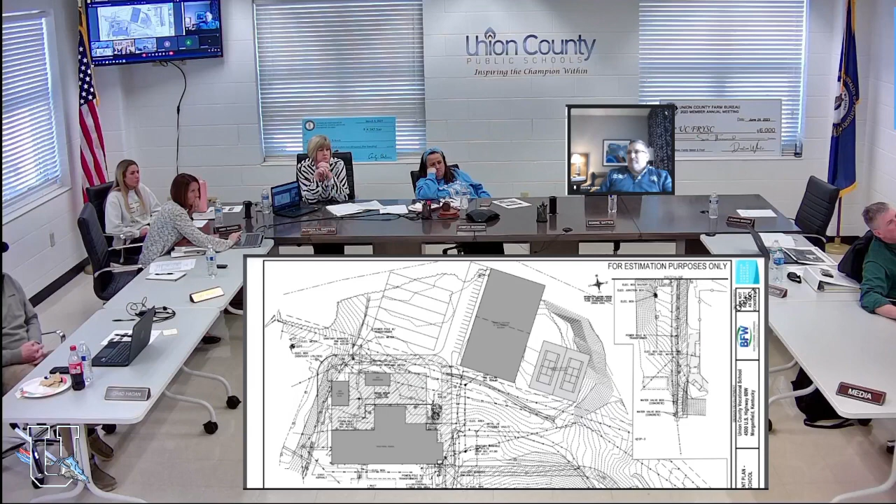The biggest thing is obviously we know that we want to do this in the most economical way that we can, and just sitting all of those, displacing all those utilities along with some of the grades that we were going to have to deal with at that location presents a challenge for us, especially from a budgetary perspective.

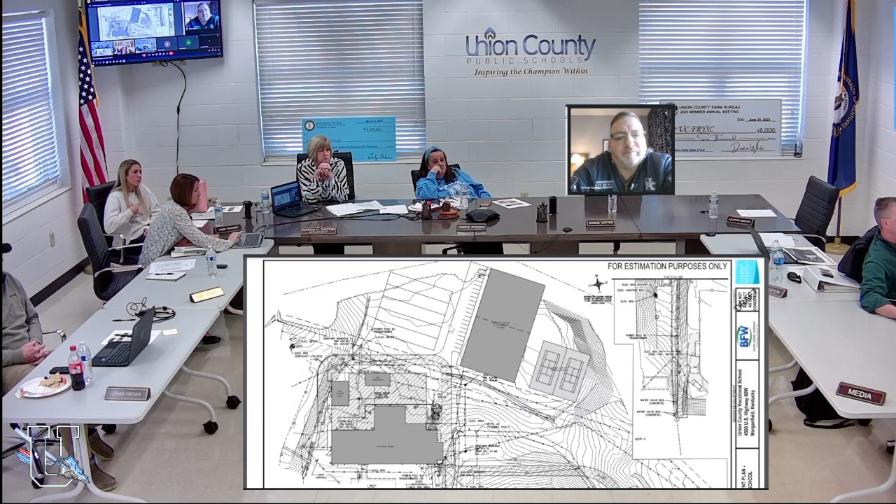So you can see kind of how a lot of these contours get pretty close in this area as well. The football practice area, if we can, kind of take some of the edge of it and maintain an area that can be used for practice, that area is much flatter, so our site development costs can be minimized as well. So those are the options we're looking at there.

I have another meeting scheduled with Alliance, the construction manager, as well as our design team on Friday to continue to think through these options and make sure that we're thinking everything through at the other locations.

So this is across the highway at the middle school property. The lower drive that you see there, existing asphalt that's indicated, is actually the drive that goes back to the bus garage. And this would be the new maintenance building. So it's really the only piece of the puzzle, if you will, that gets displaced across the road.

Everything else is right here on the high school campus. So the middle school is directly up above this if you were to zoom out. But just from a site perspective, that's kind of where it's at with some minimal parking.

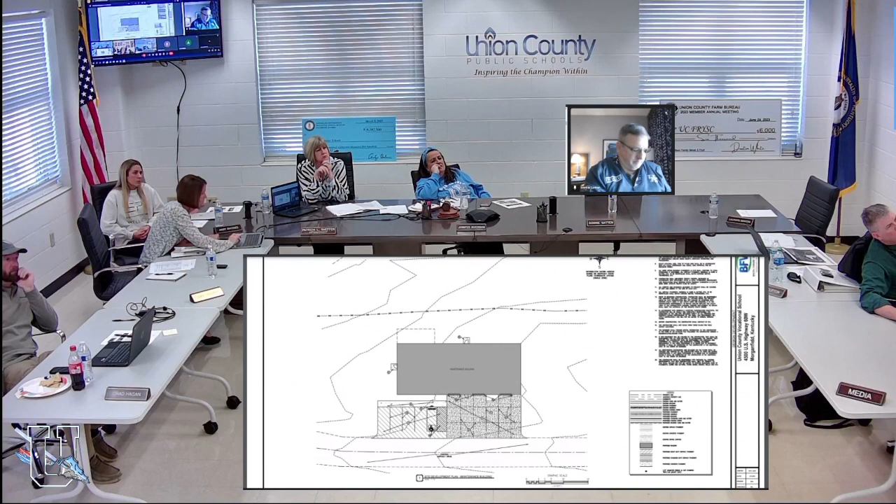So there's just like five total parking spaces, and then the concrete apron that will kind of allow service access to overhead doors along that maintenance building edge. So, and we'll get into some of the details with that as well.

So the biggest portion of our project is obviously the LAVEC renovation of the existing vocational building. We've been working closely with the staff to make sure that we're giving them exactly what they're looking for, and working closely with them about what their equipment needs are, how these spaces continue to develop. So we've been in several meetings with them to make sure that, one, we're not just giving them what they need today, but we're trying to think through what they may need tomorrow.

Also, think about how that space compares to what they have today. We've had very good meetings with them, and this is the overall plan.

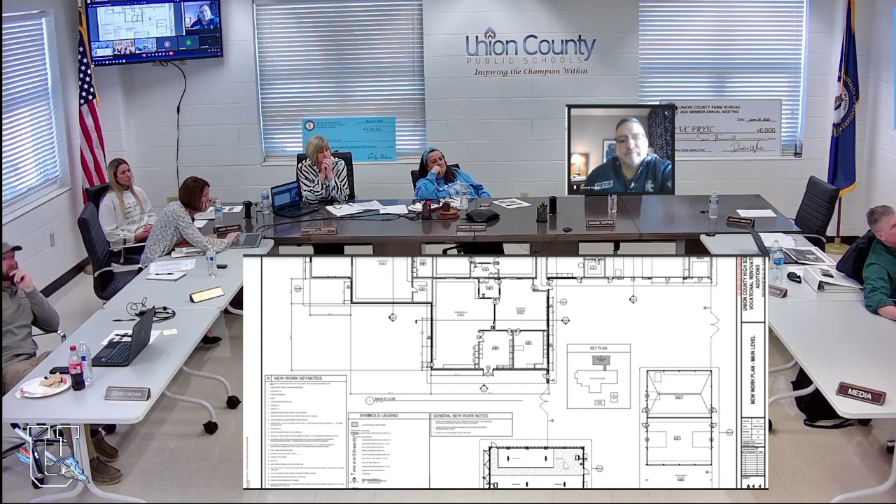If you zoom out just a little bit, scroll lower. Right there - I wanted to point out in the lower right-hand corner, the new storage building and the new greenhouse. Those help to define an outdoor courtyard and service area that can be used by the ag classrooms. All that space will be enclosed, and you'll no longer be able to drive through there. We're rerouting the drive so that becomes a safe area for students and staff to move back and forth between the storage building, the greenhouse, and the main vocational building. That'll be a much improved area for students and staff.

And there you can see, that is a building addition - we're trying to come out on the backside. It would be really challenging to put an addition between the vocational building and the high school, so we're coming out, growing toward the practice football field. That is primarily the civil engineering addition, and we'll get into some of those pathways.

There are no major changes from the last drawings, right? Just further development - the placement of the greenhouse and placement of... those have changed, correct? Okay, those have kind of settled where they've been.

So this is the lower level, and really that area will continue to be football locker area, but we're also moving a health and sports nutrition classroom down there. That will also serve as a wellness area for the football team. There's additional storage along the back, and then that central spine you see is really just further development of plumbing that's already there - it's just aged and kind of outdated.

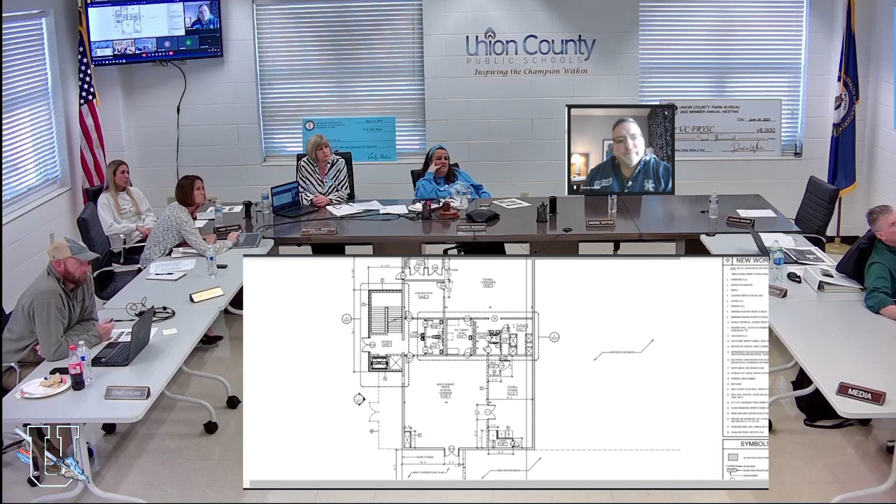On the left-hand side, that's a building addition that will be a vertical circulation. So students and staff, whoever enters the building, will now be able to move vertically from the main level to the lower level, which wasn't possible before. We'll also be looking at bidding an alternate for that elevator in the lower left-hand corner, so the hope is we can provide ADA access between those two floors without someone having to go outside and around the building.

So this is the greenhouse plan, and basically we've worked closely with the ag folks to make sure we're incorporating their comments. It's roughly 30 by 60 - comparable to what you see at most high schools that have had new greenhouses.

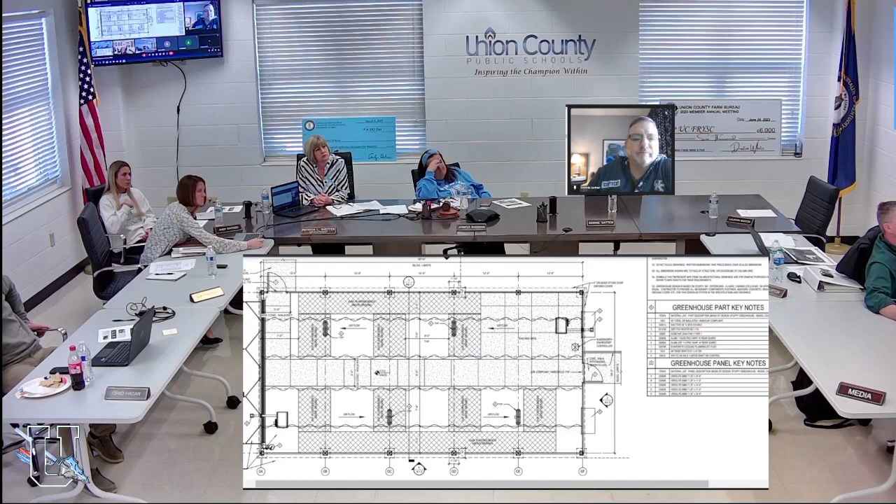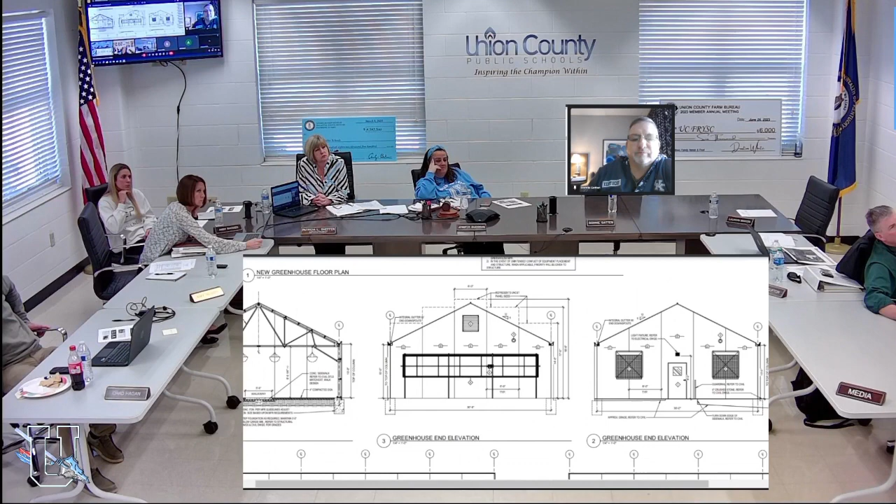And if you scroll down a little bit more, you can see what the outside will look like, as well as some features on the inside. The floor in there will be a combination of concrete walkways, primarily for ADA accessibility - we need to be sure we're accommodating kids or staff that may be in a wheelchair - but then a lot of compacted DGA or gravel areas as well, especially in the areas used for plants and that type of thing.

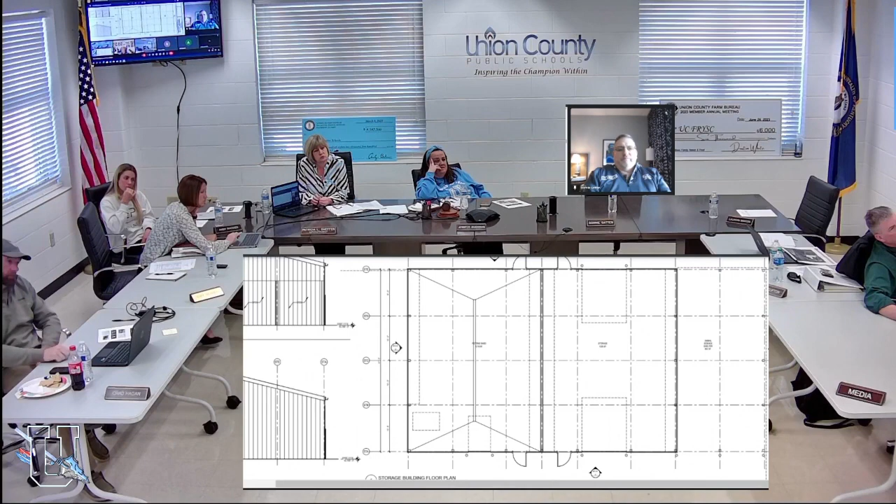So the next page is the storage building that we're putting behind the new vocational building. It can basically be broken down into three areas. On the left-hand side, a potting shed area used in support of the greenhouse. The middle area is utilized for storage, and on the right-hand side is what we're calling an animal science shelter - they do have animals they bring on site from time to time, and that will be a covered area where they can keep those animals on a short-term basis.

You can kind of see the exterior - this is basically very similar to what you would see like a Morton building. It's a wood framed building with metal panels and metal roof on the outside.

Moving inside the vocational building, this is the renovated ag area. On the upper portion, you have an ag classroom in the upper right-hand corner. To the left of that, you have a renovated animal science classroom with all the support spaces.

In that linear space at the bottom of your page, it provides access within the ag suite to those classrooms, but it also is a nice area for students to store their stuff in lockers while they may be doing welding or participating in other lab related activities. And then an office there at the end.

Moving down into the rest of the area, many of these spaces are very similar in size to what they are now. They're just reorganized and better laid out with the equipment.

Along the backside, you'll see welding stations. We've identified various pieces of equipment that need to go in there. But then on the right, you'll see tool storage, general storage, and then on the left-hand side, an additional ag classroom, some office area, and additional storage over there as well.

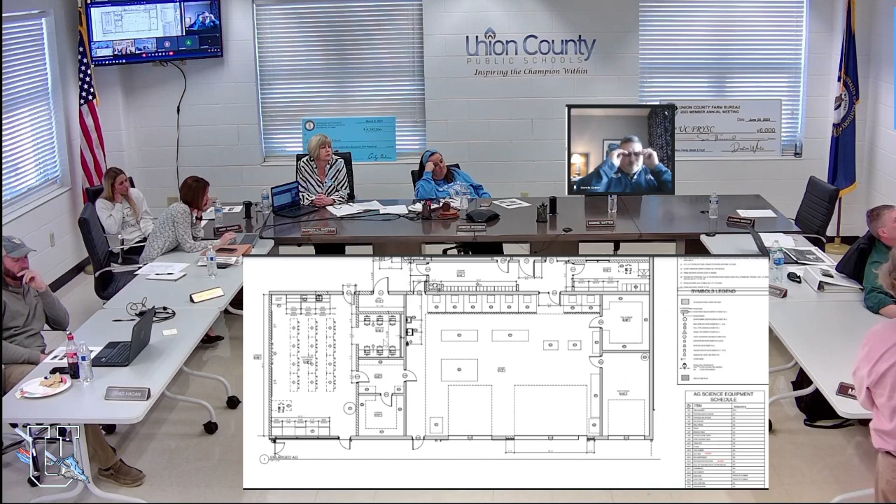So then this is the business classrooms. There are two business classrooms that you can basically see. The business classrooms have a kind of E shape - E on the left there and a backwards E on this side. That's the kind of table arrangement, and then countertops that will have computers around the walls.

Central, but located between those two classrooms, is a project area, and in working with those two teachers, they would like to utilize this area as a special kind of collaboration type area where they can bring students in and work on projects. It will also include visual access from their office below, but also an audio booth - I think they record different things and do some of those types of activities within that area as well.

And then the additions that we looked at earlier, it's civil engineering. On the left-hand side, you'll see the large lab, again with computers around the perimeter, tables in the middle for student use. Then the classroom is on the right-hand side, and the office area is kind of at the top of the page between the classroom and the lab, again with windows that provide visual access.

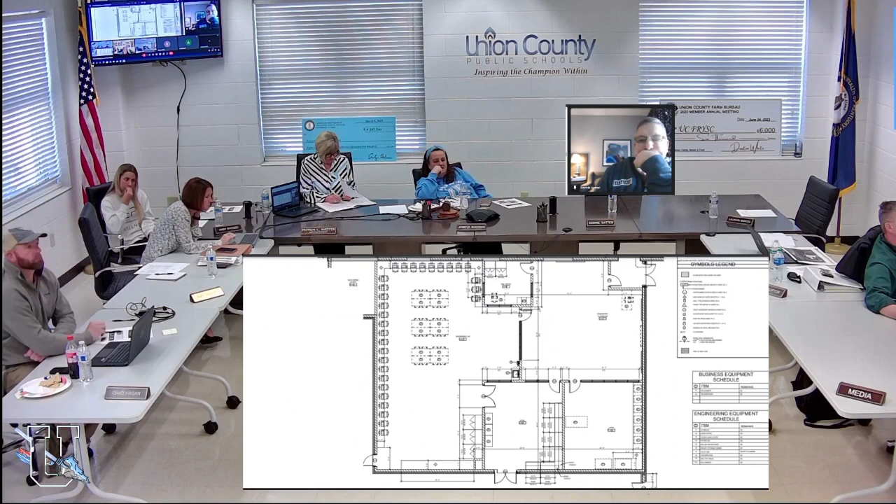Then on the bottom side of the page, you'll see a large storage area, which has access to the outdoors as well, so they can bring stuff directly into that space. And then also a room that can be utilized for laser engraving, I think, and some 3D printing and those types of activities within that room.

Then this is the computer classroom, the computer pathway. So it has a computer classroom, then a large computer lab with, again, computers around the perimeter and mobile tables that can be rearranged within the center portion of that space. Office and storage along the top, and then this is immediately adjacent to those business classrooms that you just saw before. So there's some collaboration that occurs there between the teachers that we spoke with as well.

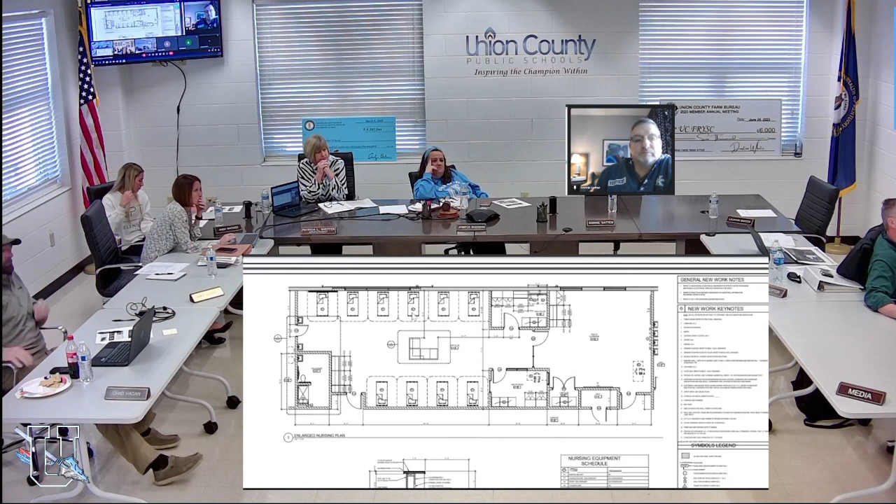Then the final pathway at the vocational building is the health science suite. On the right-hand side is the classroom, again a centrally located office and storage area above that, and then the lab, which includes 10 beds, as well as a large toilet and shower area where they can practice transfer techniques and those types of things that they'll be expected to be tested on, and different certifications that are required there.

On the outside of the vocational building, if you looked out the window right now, what you would see is over the years, as that building has changed, it's become somewhat of a patchwork quilt. So our upgrades on the outside will be minimal, but we're looking at covering some of those areas where we're making new openings and covering old storefront and different things where we're taking it out. We're going to cover that with metal panel to kind of refresh the outside, but more importantly, to cover up some of that brick that we know we won't be able to match exactly, and really give it a new look.

So the upper elevation that you see there, the rectangle on the left-hand side is the stair volume that you saw earlier on the end. And then the right-hand side there is that building addition where it's the computer lab and the civil engineering area that kind of extend into that back, what is currently that back parking lot.

This is the side facing the Board of Education, where we're at right now. You can see we're taking that brick wall, which already has a few patches in it, and covering it with new metal panel to give it a refreshed look, but also to cover up some things that we'll be patching and repairing as part of this project.

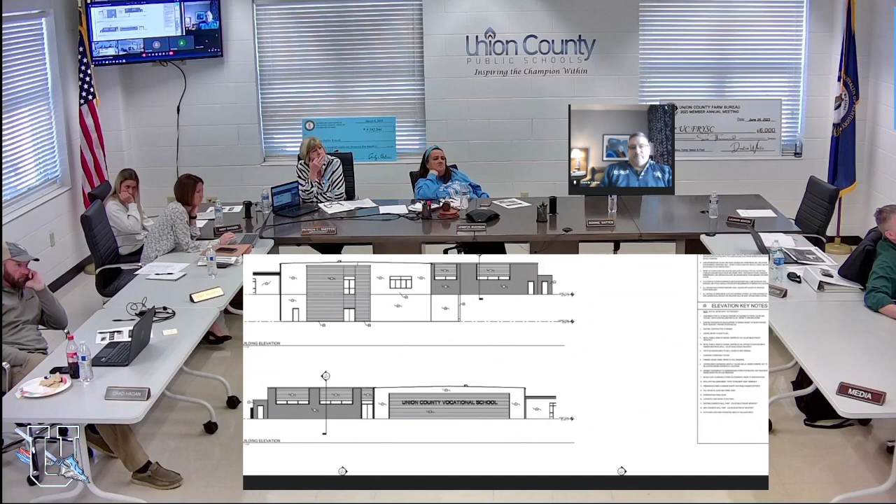The upper portion here is the side that faces the high school, and you can see the connecting corridor that goes back to it. The hatched areas are new metal panels. In working with Shane on the security requirements, we're keeping all the new windows up high so we can limit the amount of interaction with the outdoors and any potential security risk.

On the bottom, you can see we're replacing the overhead doors in the ag area, which leads to that outdoor courtyard space. It does have some windows that open onto that area from the ag space, but remember that area is completely surrounded with a fence, so it's fully enclosed. Everything on the left is the computer science addition with civil engineering, and then the stair on the left-hand side.

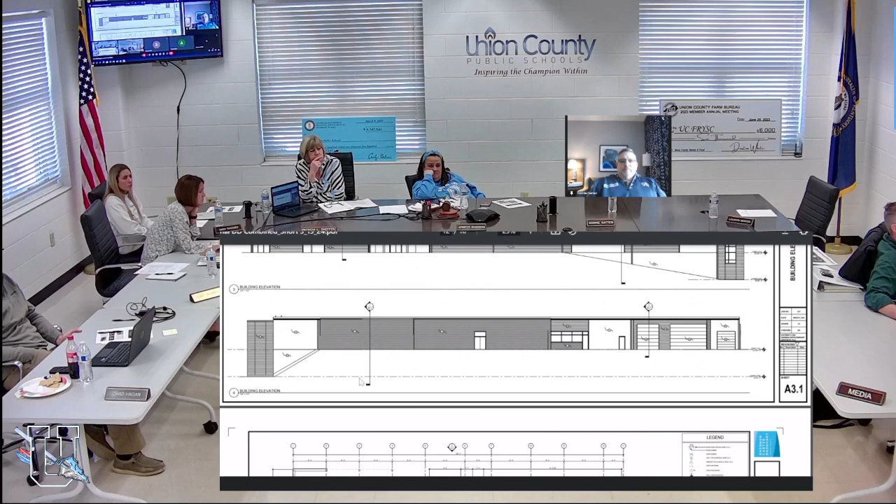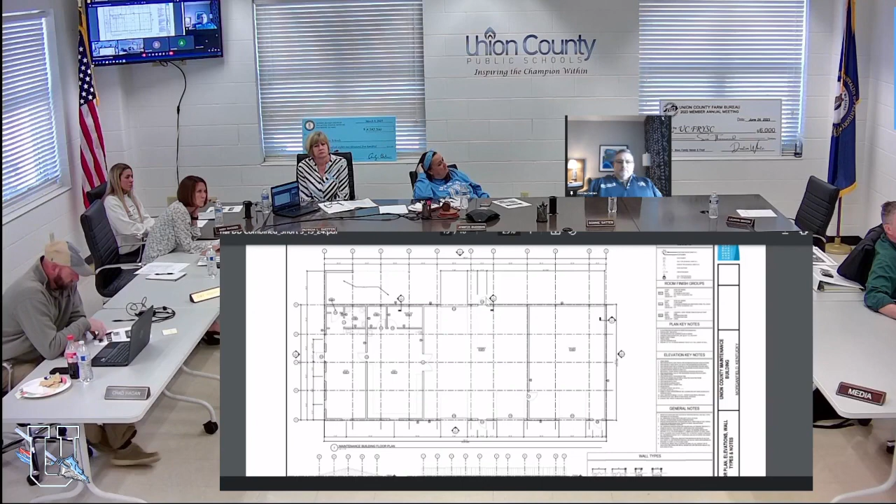Looking at the multi-purpose building, we have two options, as Ms. Sheffer mentioned before. The base bid includes the rectangle you see there, which will accommodate wrestling, cheer, and dance, as well as weight training and restroom and locker room areas. All of these spaces are necessitated by the renovation of the vocational building, since we need to move those activities so we can renovate the rest of the building for the vocational programs.

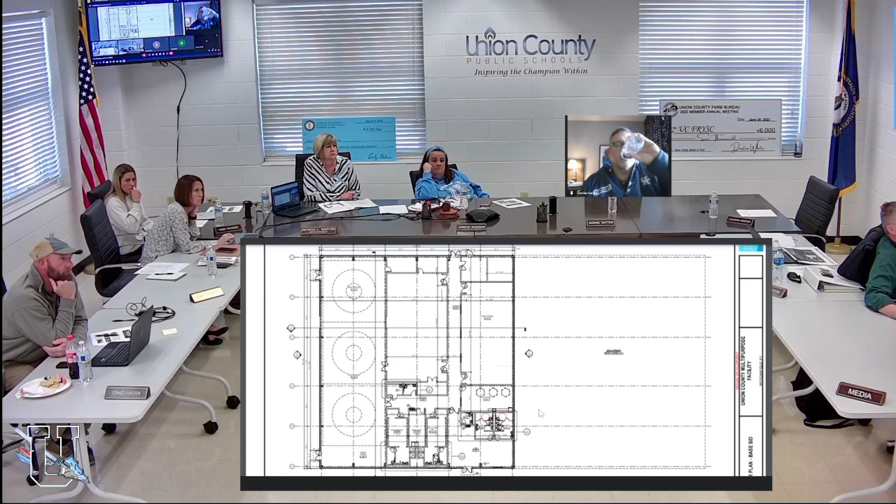The base bid accommodates all of those needs. Then on the add alternate, shown in the dashed box in the next image, you'll see an indoor practice area that can be used not only for football, but also for baseball and softball batting cages, archery, and even band practice—just a number of different activities.

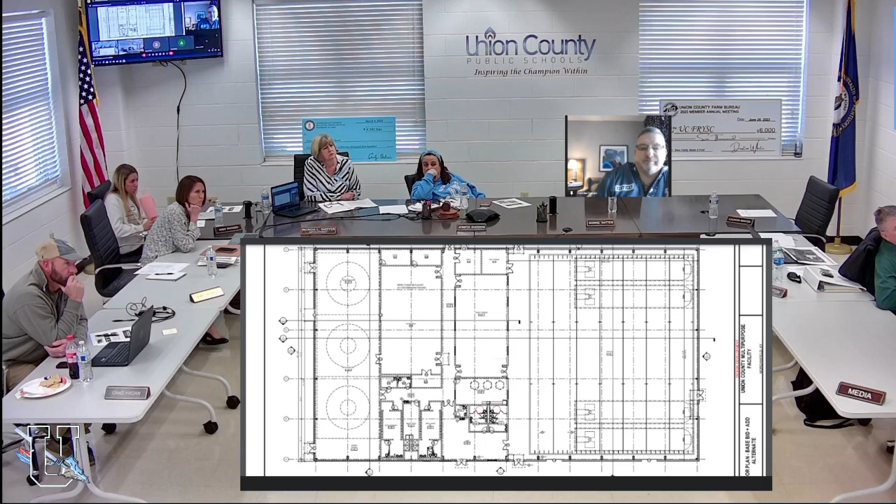The rest of the building is primarily the same, except in the base bid it will be an exterior wall, while with the add alternate, if accepted, that area will add windows and other features that visually connect the weight training area to the practice area.

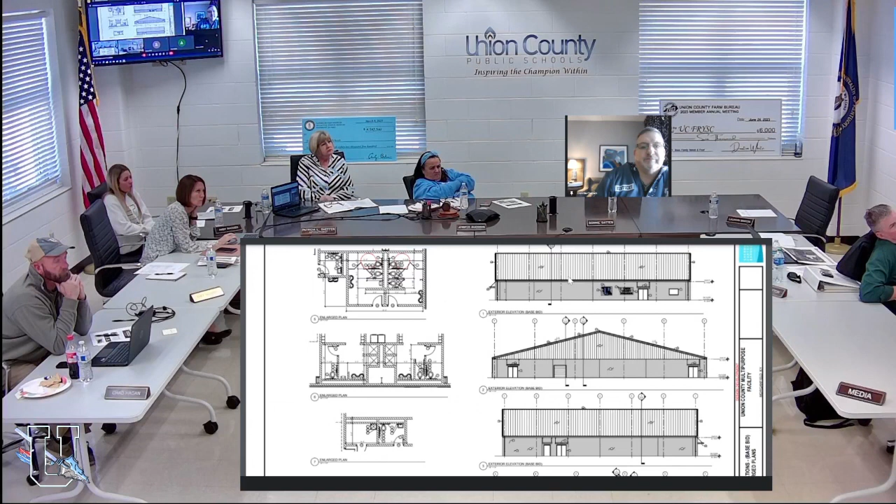This gives you an idea of what the exterior will look like for the base bid—very simple, with brick around the perimeter up to the eave height for low maintenance, and metal panel extending above that on the gable ends, as part of the metal building package.

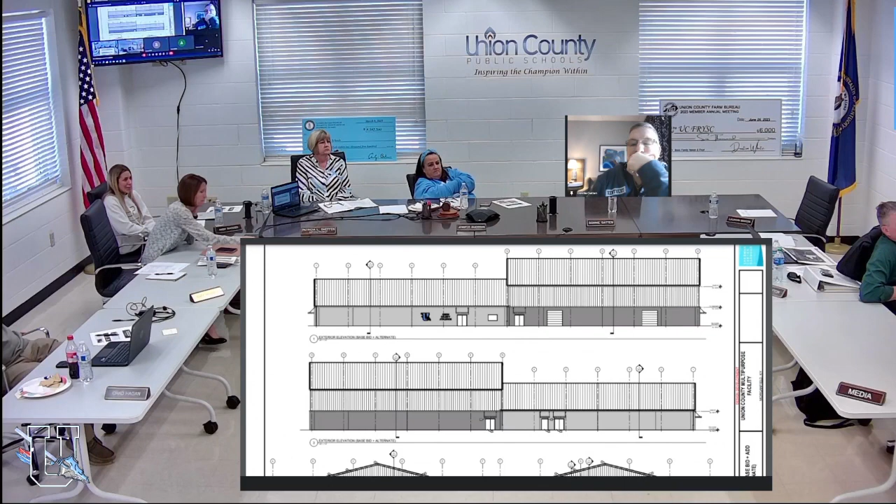With the add alternate, you can see the different, higher volume needed for football training and similar activities. Where we have wrestling, cheer, and similar uses, we're keeping a slightly smaller, shorter volume to help keep costs down. You can see how those volumes relate to each other—brick up to about 13 feet 4 inches around the perimeter, and then moving up from there.

This is the building section, which gives a good understanding of what those volumes look like. You can see that even within the cheer and dance volume, there's a lot of space so they can do their stunts and similar activities.

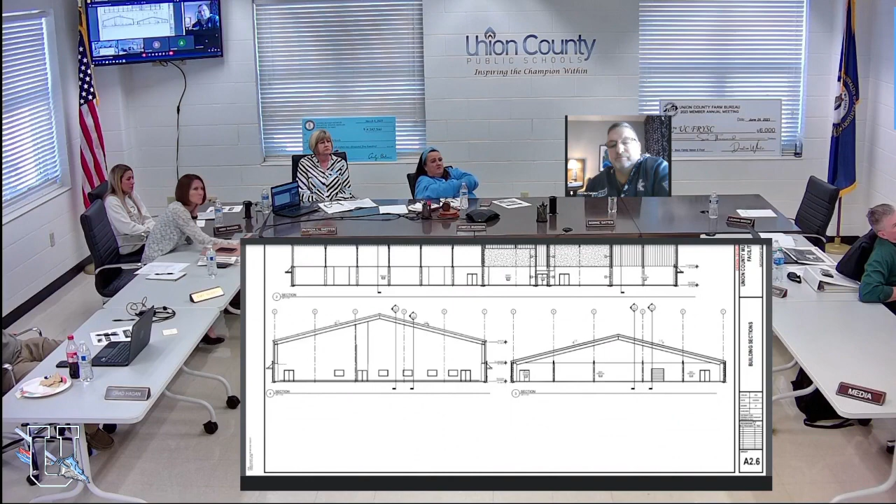I know that probably felt like drinking from a fire hose, but if there's anything I can answer today, I'm more than happy to do that.

Has that site been checked for pipes and electrical utilities in the parking area? We know where all the utilities are running now. It seemed like the bulk of the problem is primarily where we were siting the multipurpose building, with all the utilities that run to the concession stand, the softball field, and everything on that side of the field running through that area.

On the opposite side, where we're proposing a possible location for the tennis courts, we're going to look at doing some additional testing over there, probably at least some test pits. Obviously we won't have the kind of footings associated with the multipurpose building, but we want to make sure any paving and those types of things are on good soil. We have the road location and did some preliminary testing on it, but we'll need more information for where the tennis courts might go.

How much room is there allowed for parking there? We'll need to look at that as well.

The one thing we've talked about is that loop road that extends from where we were proposing the multipurpose building and around the backside of the football field. We're looking at that as an add alternate. We think it'd be nice to have, and it will help ease congestion, especially coming up on this side of the building and extending around the back. But if we get into a situation where we have to cut some costs, that may be one area we do that.

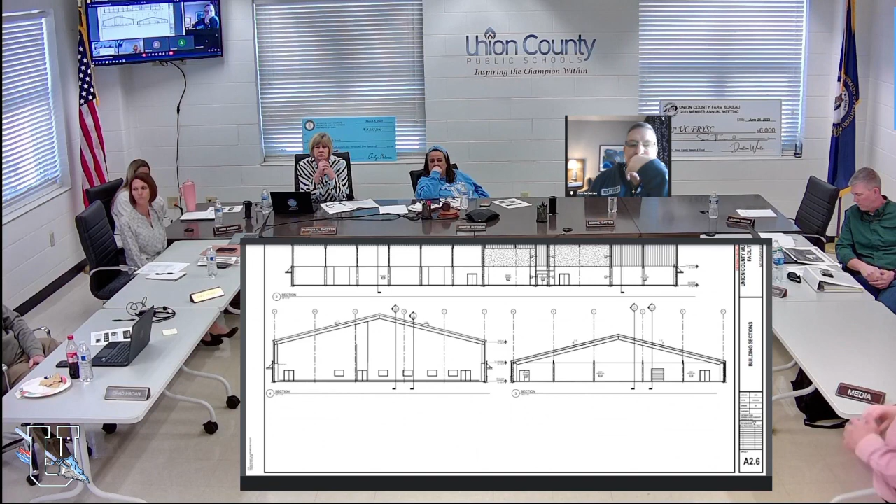We'd also looked at possibly picking up some additional parking spaces on that side by softball, and we'll look at that when we put the tennis courts over there to see if maybe we can pick up a few spots. There's some parking by the football locker room, right? Some, yeah, is that what you're talking about?

Yeah, we had talked about over on that side maybe picking up a few spots, primarily for softball. I think primarily they use the parking lot below where a lot of students park, but for accessibility reasons, especially if we can get folks up on top of the hill closer to the softball field, we were looking at possibly picking up some spots up there as well, kind of like we did at the baseball field, those couple spots behind the bleachers, to accommodate up behind the softball.

Well, I personally like the idea where the new proposal is better than the old. The old timers always say, if you're gonna build something, build it on a hill - that's a hole down there at the football field. Well, we would have to add a retaining wall too around all that. Sure, you're gonna have a lot of drainage to deal with around that building.

That's why you get the engineers involved. It's kind of a little wasted space right there, so I understand trying to fit it in there, but I think long-term, being on a hill like that will be better for the structure over time.

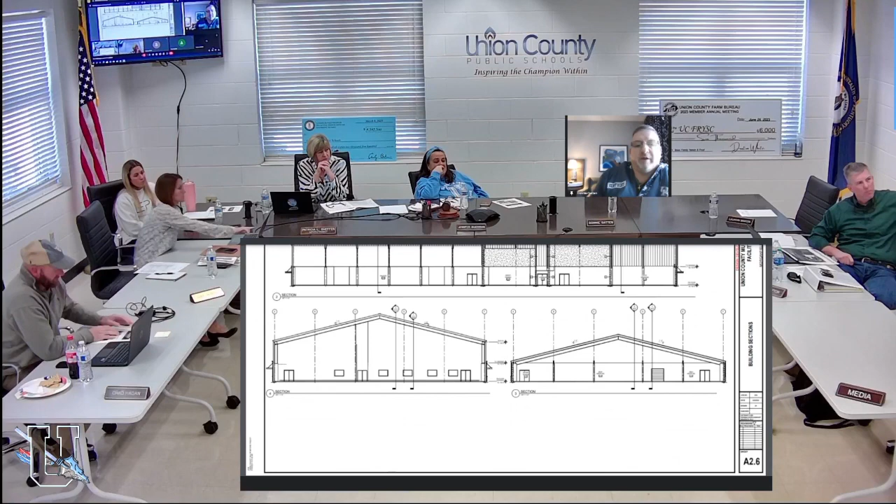Can you get the tennis courts on - sorry, go ahead. Oh, go ahead, Greg, you're good, go ahead. In this view you showed tennis courts, I think two courts - is there more room for future expansion there, or no? That's the old one, yeah, if you go down one page, Amy.

Sorry, I'm trying. Computer's not slow, it doesn't want to cooperate.

There's kind of a chicken and egg situation. If you're able to afford the indoor practice facility, then you probably won't need the outdoor football practice area quite as desperately, and you could look at expanding that into additional tennis court area. But until you know whether you get that indoor space, we felt like we need to preserve as much as possible that outdoor football practice area.

You can kind of see there, those contours on the right-hand side of the tennis courts get pretty tight. That's why I was wondering if there was room for more. Probably not.

Is the corner of that one tennis court in that woods? You can kind of see the clouded area. So we would be clearing a portion of that. Is that a complete drop off? I've never been up there. It looks like it drops off pretty fast, about a 30% grade.

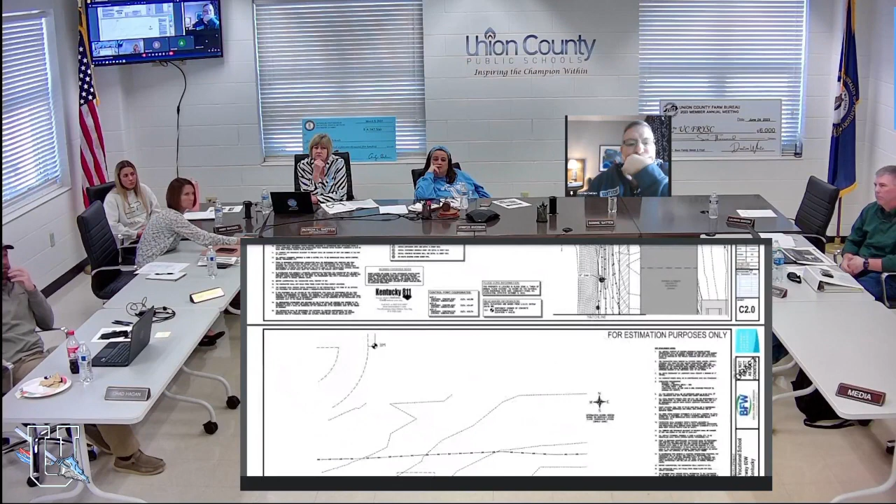So the inside of the maintenance shops, will they just have steel on the inside, insulation steel, or? It'll be a combination—in the office area it will actually have drywall, because we'll be heating and cooling that office area. So from an energy code perspective, we basically have to build a double wall to make sure everything is insulated properly. But out in the maintenance bays and storage areas, we're basically looking at heating and ventilation, so it'll be a combination of insulation and a liner panel on the inside to provide some protection.

Most of that is probably the most cost efficient—that's what we normally would put, a liner panel. But I'm just getting in my mind how, I didn't know if there was a certain R value you gotta meet out there. When we're just heating and ventilating, that's one thing. If we try to cool those areas, that's where we run into additional energy code issues we have to consider.

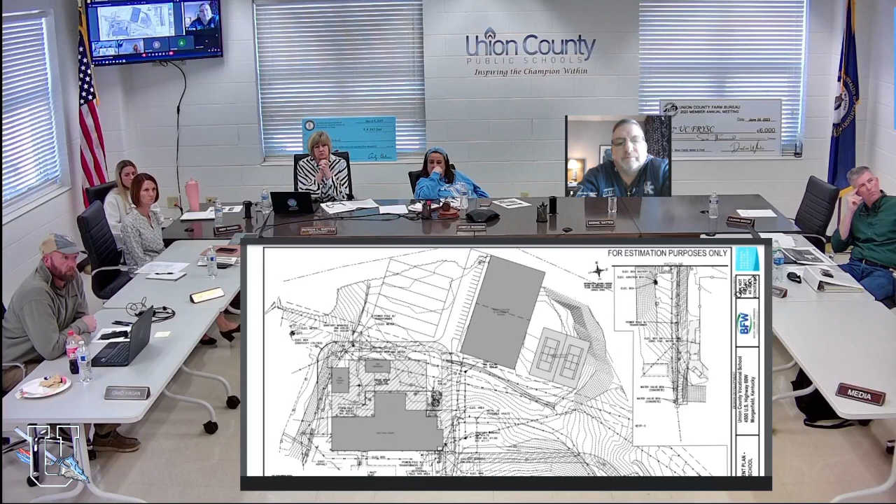So like the bus garage, with the steel building and the insulation—is that not more cost efficient than doing the wood structure? You don't have to really do anything on the inside of it, other than your offices.

Two considerations. One, those components we're moving are some of the first phases of construction, because we need to get them out of the way so we can start doing things over here on this site. Some of the metal building packages, especially here of late, have much longer lead times, so we feel like the wood package will help expedite that process. But two, in talking with Alliance, we felt like that was probably the most cost effective. When you get into longer spans and some different things, those metal buildings really make a lot of sense, like we're doing for the multi-purpose building—you can only stretch lumber so far.

I know I've gotten into it before, and sometimes you would think steel is just crazy higher, but you're allowed to do a little more with steel sometimes.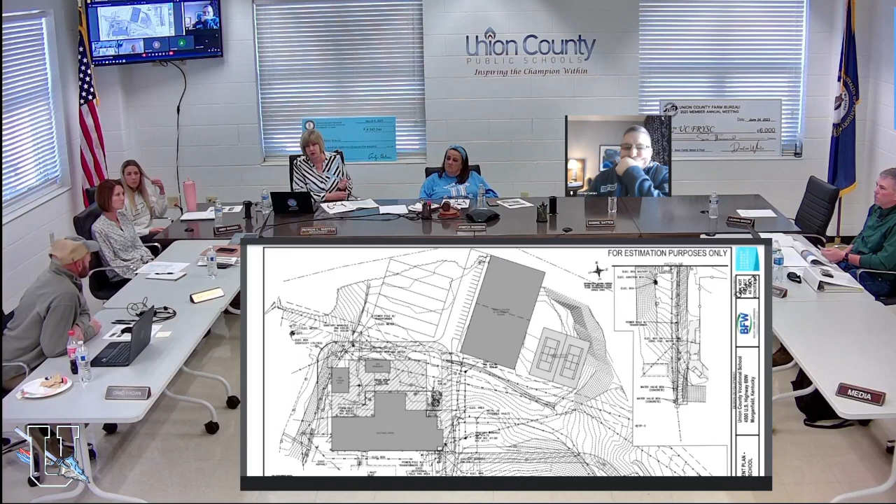On building 64, wasn't that big, right? We used to park on the side, but there's fiber optic under there now. We lost some parking with the connector. When I went to school, that's where I parked, on the football side. Then they had to put fiber optic in there, so now we're not allowed to park over there. We used to park on the hill on that side, but now we have to work around the fiber optic. We didn't have preschool out here.

I feel like it's actually gonna work out better up there, we talked about that, but just a lot of decisions to make. To me, if you want it on this property, that's the best option we have.

And there'll be some parking in front of that building, there's parking where we have preschool parking now, on the side of the vocation building, that'll still be there, and then all this parking up here, parking at central office.

But we're rerouting the road, correct? It's coming behind, yes, so it's gonna come around back to the football field, right next to the horseshoe, right through here.

So I could see people parking in this area. Well, I just didn't know, like, some of this...

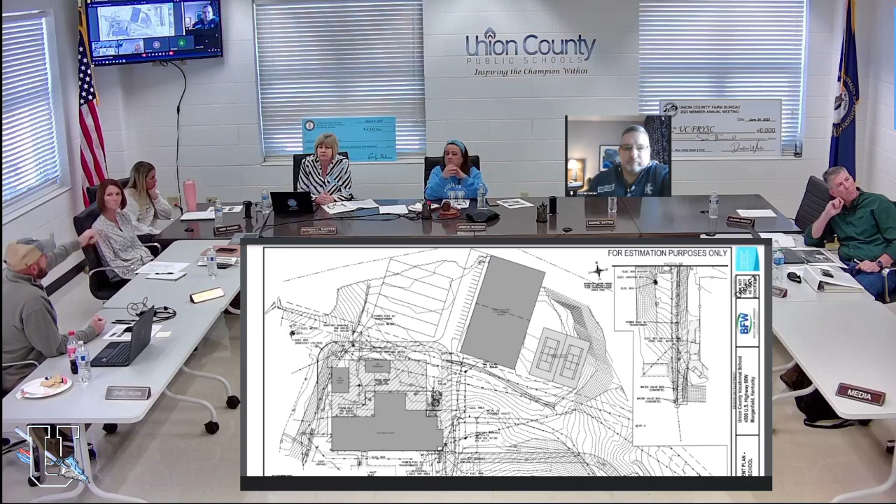Is their storage office or maintenance office now, is that all gonna be where the greenhouse is going, or is there some space there? It's got some. Right, that'll all come down, but then we'll have that courtyard for ag when they come out of the vocational building, and then you have the barn and greenhouse, so that'll all be set.

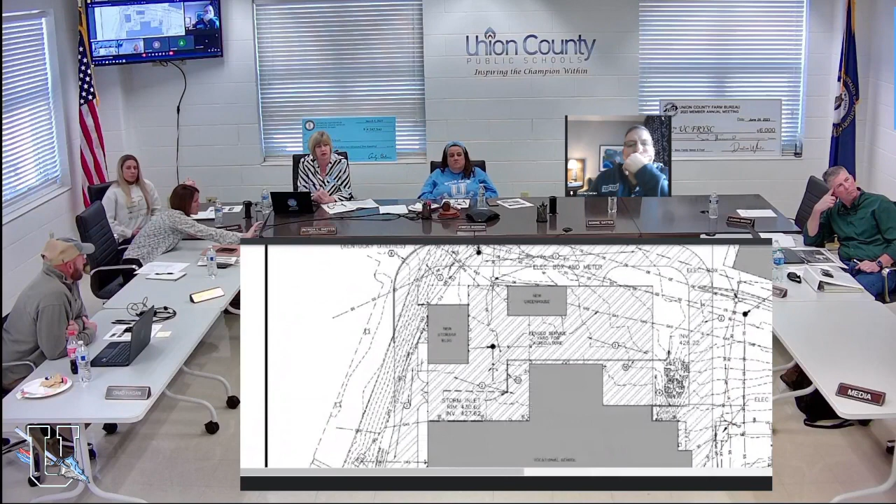Yes, because they need that space when they pull trailers in there and things like that too. So that'll be taken up, but we'll look at more of that. If we could add more parking to accommodate, that'd be great.

I'm just trying to get it in my head, like if you're gonna pull in 350 people in this building, we gotta make sure. I guess you could park here and walk, like they do now for ball games. I've been to a basketball game when we had regions and had to park at the middle school and walk over here.

We've done that for graduation and everything, yes. So that's my only thing in my head, is just trying to figure out how we can park. But, man, you can park here and just walk, get here early if you want a good parking spot. It's tough.

I think most schools running that, if you're remodeling, you have old buildings like 64, but if you have brand new ones, there's a lot of land they purchase. That would've been nice. We actually have more land at the middle school area than we do here.

Would've been nice if you could've made it work by the softball field down there, the girls' softball field, you had a little parking lot there. That was our first thought, but then the engineers got involved, and it was the water. You would've had to build it up high. Building up there still would've probably been easier than here beside it when you look at all the lines, but you always have that issue of water. For sure, in Kentucky, for sure.

Maybe jumping the gun, maybe a different phase of this process, but you talked about metal coverings on some of the exterior of the existing buildings and the new metal and brick of the new buildings. Color schemes and color choices, is that later on, or are you considering that now?

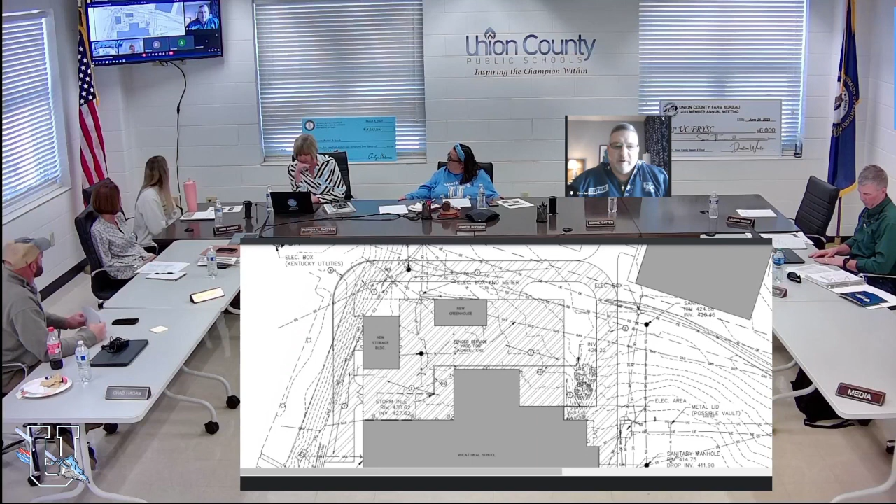Donnie, do you happen to have anything else for general discussion before we adjourn? No, I'm good, I'm looking forward to when we get some more firm numbers on what the cost of all this is gonna be. Right, I agree, that's what we're all looking forward to, and hopefully they come in low. Yes, I hope so. Okay, thank you for joining us.